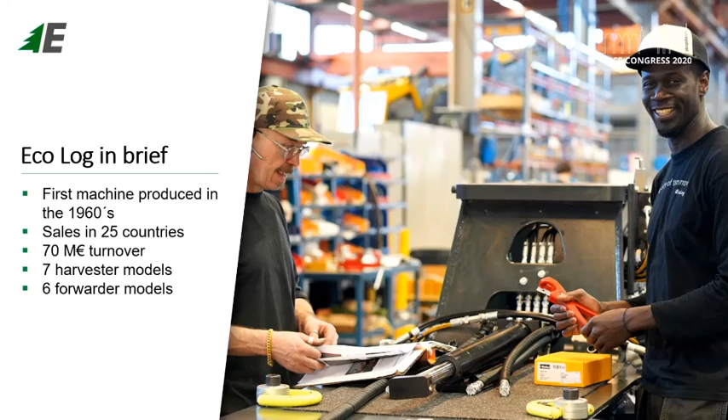I will talk a little about Eco Log, the forestry of tomorrow, and the opportunities and challenges. Just some briefs about Ecolog: the first machine was produced in the 1960s, obviously not under the brand of Eco Log, but still in the same facilities as we are today, in the beautiful mid part of Sweden called Söderhamn. We have sales in 25 countries, a turnover of 70 million euro, and 7 harvesters and 6 forwarders.

Let's look at a video just to illustrate how these machines work in real life.

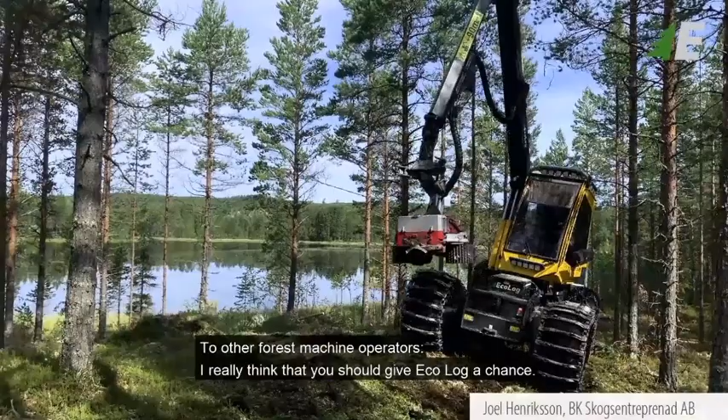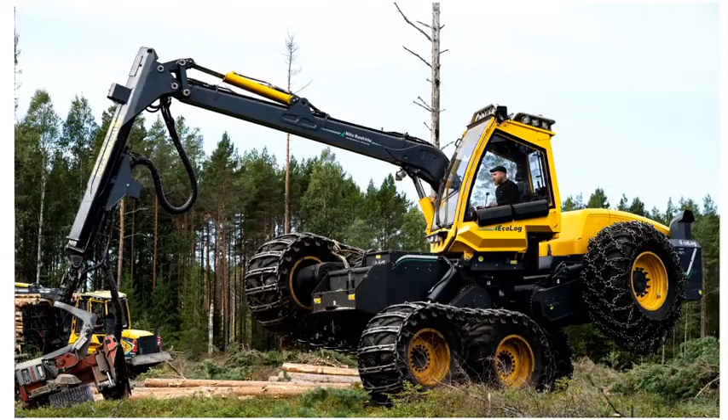So that was an overview of forestry of today and what our machines can do. And this is a slide actually to show what you really can do with the machines. These are the pendulum arms that enable unique features.

This is another slide to show you what you can do. Now you ask yourself, is this a yoga session for forest machines? No, it's not. These features are really good for mainly two things: it enables the machine to maneuver in terrain which is not possible with other machines, and it just makes the machine more efficient.

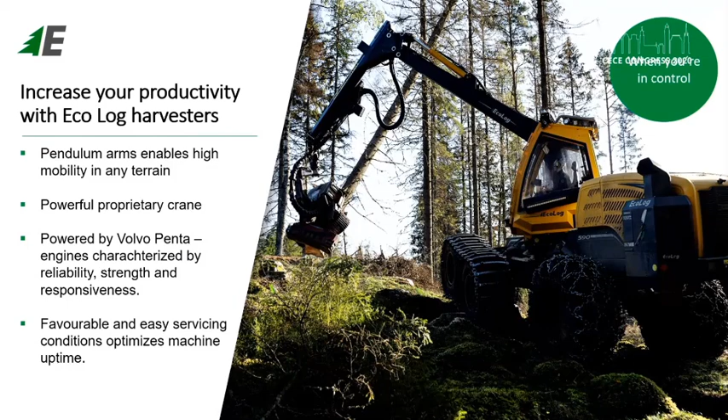You can reach trees thanks to the pendulum arms. Also, you minimize ground pressure, which is a really important part of a sustainable future. So in essence, the pendulum arms are the unique feature. We have a really strong crane. The machines are powered by Volvo Penta, which gives reliability, strength, and responsiveness. They're really easy to service, which optimizes the uptime in the machine, which is essential in our business.

Let's spend just half a minute looking at digital forestry and the development over the last 100 years. Let's say we can call it from handsaw to the cloud, and let's illustrate that with a movie.

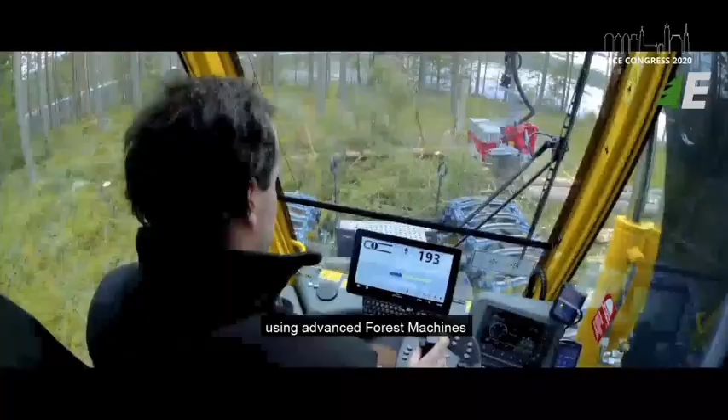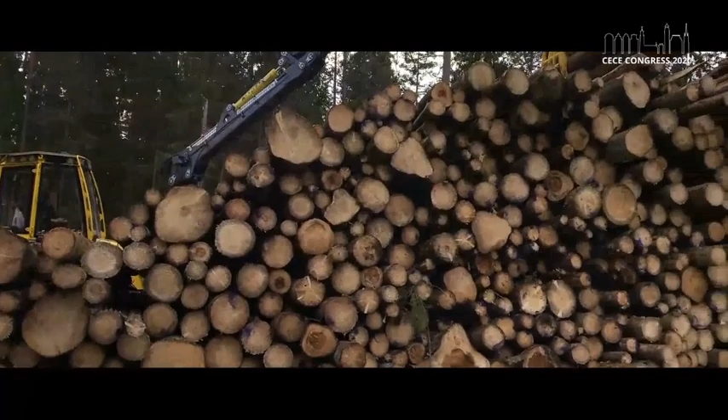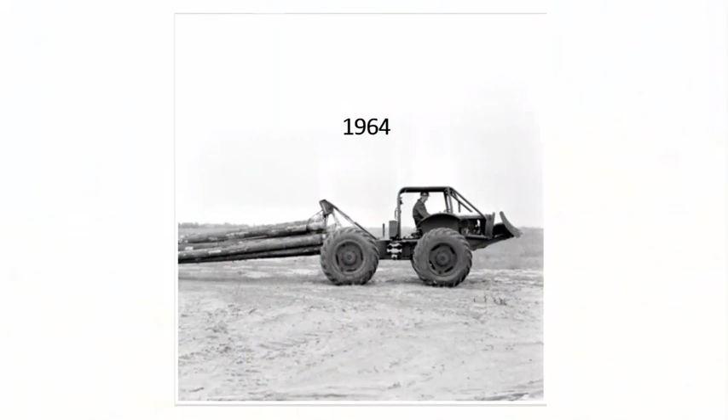This is a machine from 1964. It's actually one of the first Eco Log machines that were produced, under the brand of Kockums. This is a machine that pulls trees from the forest, and I can assure you that the driver is not looking at a touchscreen.

But the driver today is actually looking at touchscreens. He's surrounded by complicated computers that help him do a really good job.

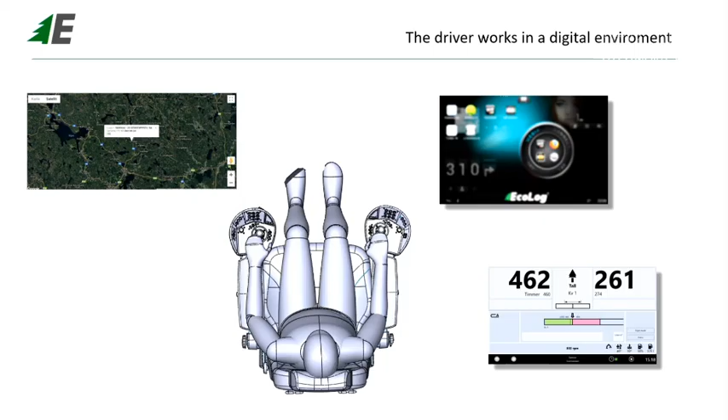What is maybe even more interesting is if we look at a Swedish sawmill today. Let's say the sawmill has a customer with a huge building project. The customer sends a request to the sawmill with certain specifications on the products. The sawmill has access through, let's say, 50 to 100 harvesters in the near area, all connected through the cloud, which in Sweden is called Biometria.

The sawmill can decide which machine can perform the best job to provide the products. A digital file is downloaded and the machine produces logs according to specification. The location of the logs is sent to a forwarder who pulls and transports the logs to the roadside. The location is sent to the truck driver who transports the logs to the sawmill. The sawmill processes the product and delivers it to the customer. Even while working in the forest, the sawmill has complete overview and can watch the production process online, in real time.

Let's finalize this with some challenges and opportunities in forestry. Over time, the demand for fiber-based products will increase. The number of fiber-based applications are increasing. You probably all know that paper, packaging, construction, furniture, bioenergy, fuel, and board are today standard products from forestry. What's also coming is chemicals, clothes, and food.

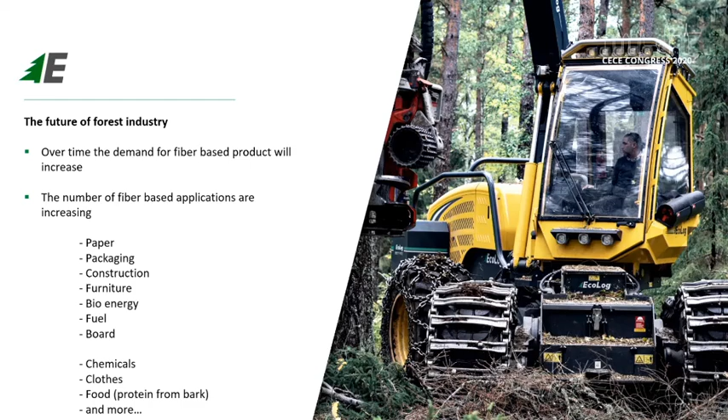And you say food from forest? Oh yes, you're looking at retrieving protein from bark and much more. So how does this add up?

That's a good question, let's have another example from Sweden. Sweden today harvests approximately 90 million cubic meters per year, which, by the way, is 90% of the growth in the forest each year. The increased demand is environment, another 9 million, new products, another 10, pulp industry, another 8, bioenergy, another 25 to 50.

So, at best, the supply would be 100 million cubic meters. The demand will be 150 to 175. That's one challenge, and on top of that, this is long-term applicable to the global forestry industry as well.

So if we summarize this, automation and decreasing man-hours will absolutely continue, as in all industries. We need to focus even more on sustainable forest industry. We need to utilize more of the tree, and we need to plant a couple of trees for each one harvested.

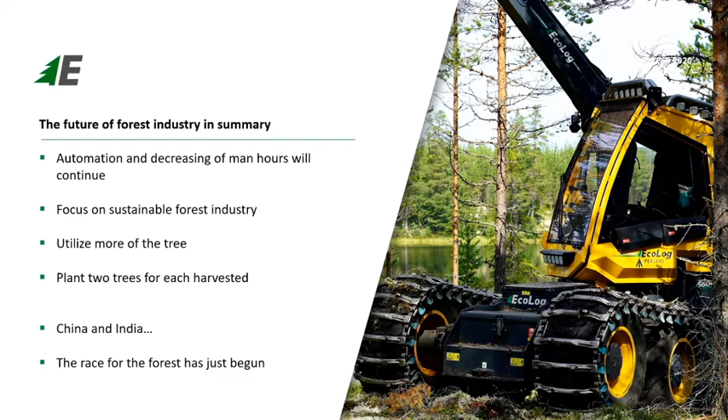And on the slide you can see China and India. When they start to utilize fiber-based products, the same way we do in Western countries, the challenge increases. So you can say, in essence, that the race for the forest has just begun. And it's really nice to be in the right place in the food chain, producing sophisticated, modern, high-end yellow forest machines.

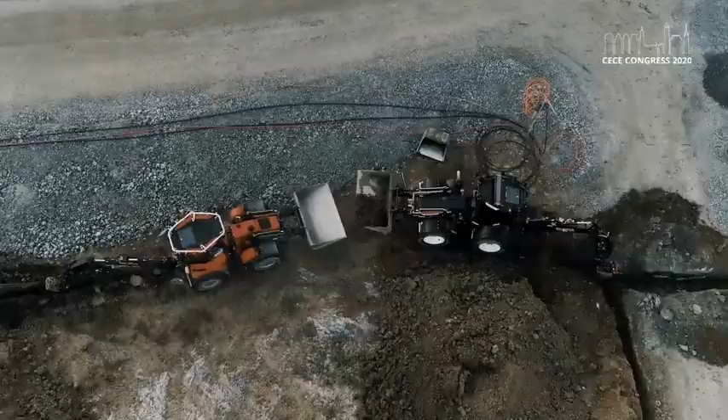Today I will talk to you about our full hybrid, which we call Tigon.

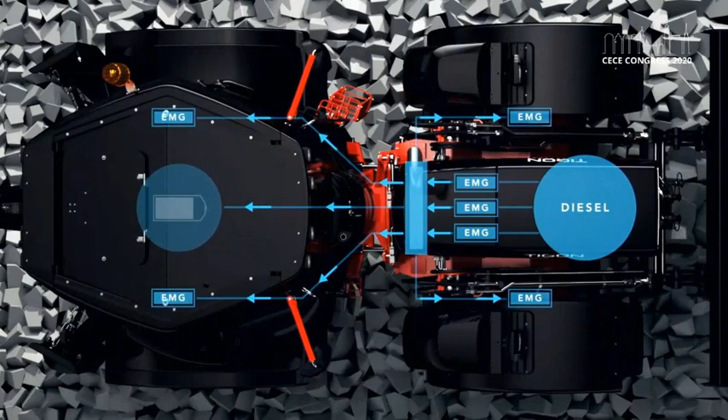The question is, why did we decide to go for building a full hybrid? Some years ago, we made a strategic decision to develop a new product that would minimize environmental impact, focusing on reducing emissions, reducing noise, and at the same time improving performance. We started looking at electrification, but keeping in mind customer needs and how our products are being used, as you saw in the video, we understood that would be a very difficult task for us.

Let me talk a little bit more about our products. We produce products for 3 different segments. We call them city, cable, and rail. City being a service machine used in city areas by municipalities, a very flexible unit that can load trucks in the morning, be used as a service machine on construction sites during daytime, and snow plowing in the evening.

Then we have the second segment, which is cable. The cable machine is equipped with a mobile working platform we call lift, and with it you can access 22 meters up in the air, working on, for example, power lines. These machines are typically very far out in the forest, working on maintenance and building power lines. And the third segment is rail.

The rail machine is equipped with another attachment we call high rail, and with that system we can go up on the rail and drive along it, performing different work tasks as we go, for example brush cutting, changing sleepers. We can even work on the overhead contact lines, even inside tunnels.

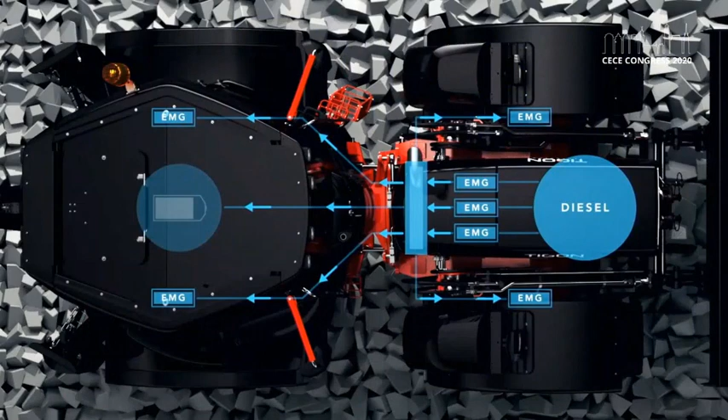So how does our hybrid system work? I will share a short presentation with you, and you see a machine from above. Our machine is actually able to run on power from the diesel engine, or power from the battery, or from diesel and battery together, and it can also be connected to an external power supply.

In this picture, you also see 7 EMGs. EMG stands for electrical motor generator, which means these components can work as an electrical motor or an electrical generator, depending on the direction of the power flow.

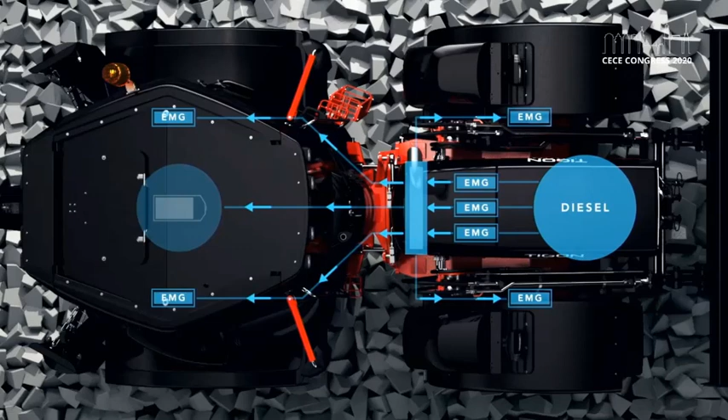You can also see that 4 of the EMGs are connected to the final drives, one at each wheel, which means we can individually control the speed of each wheel. There is also no mechanical connection between the diesel engine and the wheels, which means that independent of transportation speed, we can run the diesel engine at the sweet spot, the RPM with the highest efficiency, the lowest fuel consumption, and the lowest emissions.

When we steer the machine, we also measure the steering angle in the articulation, and by doing that we can control the speed of the wheels. So in this example, we slow down the wheel speed on the inner wheels and increase the speed on the wheels on the outside. We do this because we want to eliminate tires rubbing against the ground.

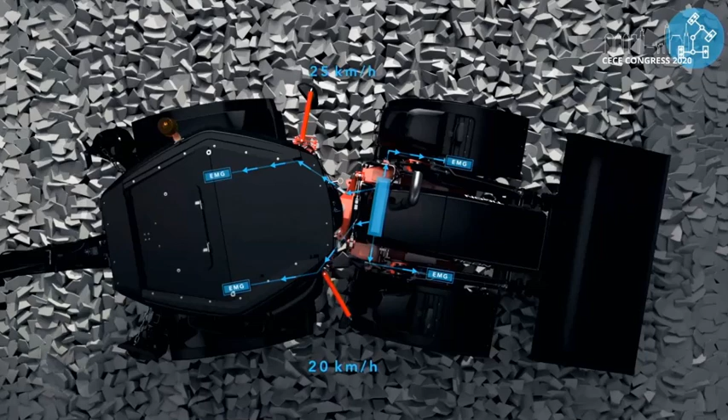Another feature is that if the operator, for example, is out snow plowing and pushes the bucket or snow blade hard into the ground, the front wheels can come up in the air, so only the rear wheels are in contact with the ground. In a conventional machine, it would go straight forward. In our situation, the right hand wheel will still be going slower and the left wheel faster, so the machine will anyway be turning to the right. That's a big feature.

The third advantage with this system is if one of the wheels starts to slip, the torque will immediately be transferred to the other wheels with grip. So here we have developed a software differential for optimized traction.

This picture shows a machine in boost mode. This means that when we use an application which demands a lot of power, for example snow plowing, we run the machine on the diesel engine, consuming basically 100% of what the diesel engine can provide. If we run into deeper snow or go uphill, the machine will slow down. Then we can add up to 30% additional power from the battery package, so we can maintain speed and productivity. So this is one way to have additional power available.

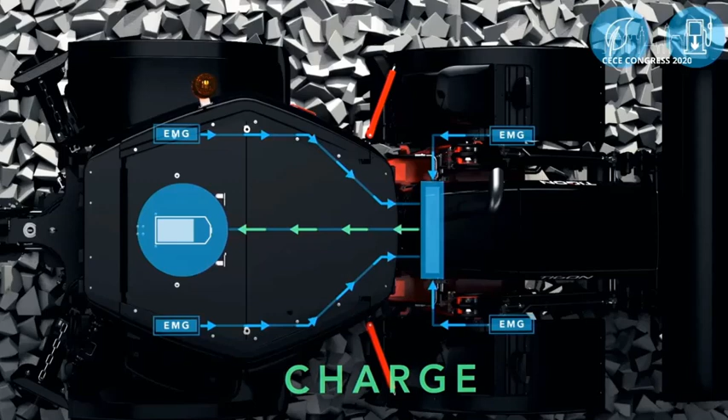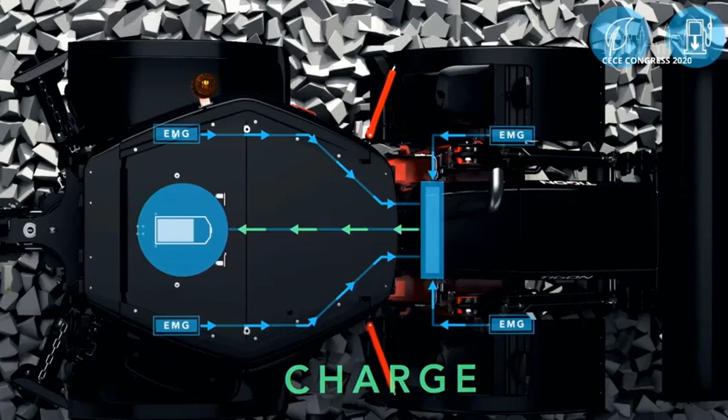When we have gone up the hill, on the other side we come to a downhill, or we can brake the machine. We brake with the service brake. Every time we brake, as long as we have capacity in the battery, we will actually use an electrical brake. Of course, there is also a mechanical brake available when needed. But in this case, the EMGs out at the final drives will be working as generators, so they will actually be charging the battery and slowing down the machine. So this shows how we can also regenerate energy.

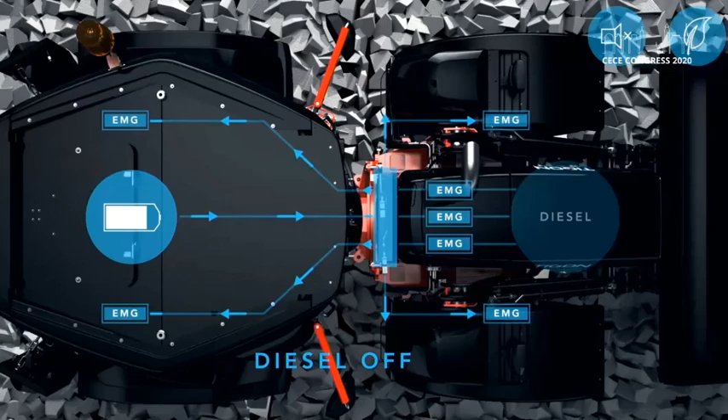And finally, I want to show this picture when we operate the machine in EV mode, electrical only. In this situation, we take the power from the battery package, or we could also take it from an external electrical power supply if we are on a static work site or have very limited movement on the machine. So here we still have full access to all hydraulic functions and the transmission at full capacity. We have no fuel consumption, no emissions, and no engine noise. So this shows some of the advantages we can achieve at the same time as we minimize the environmental impact.

I will wrap up my presentation by showing you another video. It's a video from a test drive with one of our test operators in one of the prototypes. Thank you.

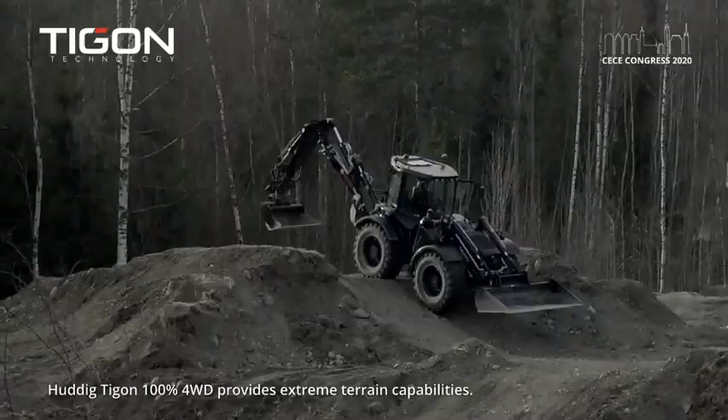When driving Tigon, I feel in full control. I can put the power where I need it, and it's quiet yet really powerful.

Great, thank you Lars for that presentation. Such an interesting innovation in the machine. There's a lot of advantages we can see. Obviously emissions are the first obvious one that comes from a hybrid, and of course then the issue with traction, again not damaging the ground. Exactly, that is a critical issue when it comes to construction, forestry, etc.

But look, the hybrid model has been in the automotive industry for over a decade, at least, if not more. So I'm really curious if you can give me some background on the development of this machine. Yeah, actually we started to build a first concept machine. We showed the first concept machine in 2015. That was built on standard components, not really designed for this industry. But since then we have been developing several components together with some of our suppliers, in cooperation.

For example, we have developed a new type of final drives. We have developed the EMGs with their control system. We have developed a battery package. Over these 5 years, we have changed the chemistry in the battery. We have also designed a liquid cooling system for the EMGs and the battery. And there are many, many things. We now have a stage 5 engine in the machines, and during this process we have also rotated the engine 180 degrees for better serviceability. So during this time we have done a lot of improvements to the product, and now we are ready for the pre-series.